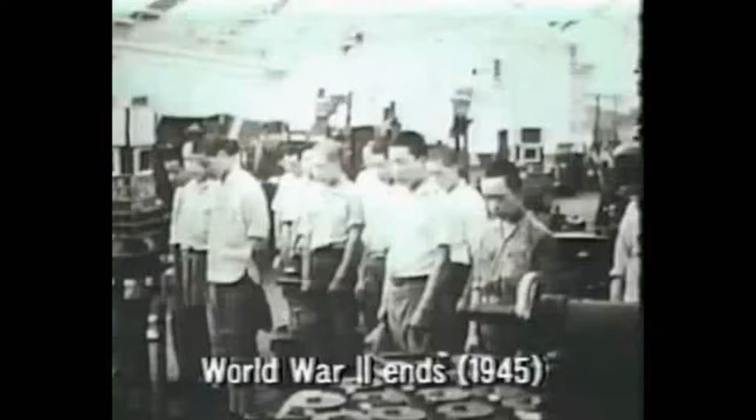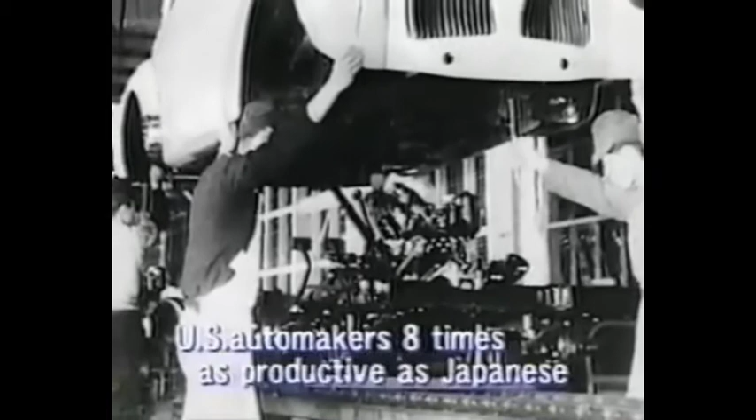After the war, Kiichiro passed on his dream to his cousin Eiji. He instructed Eiji to bring the company up to U.S. standards of technology within 3 years. That was a daunting task. U.S. productivity in automobile manufacturing was 8 times higher than Japan's, and Toyota was short of equipment and capital.

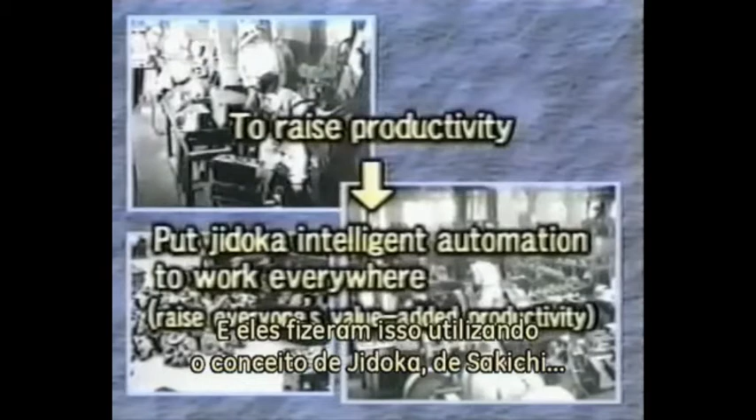So raising productivity was a pressing issue. Eiji assigned a machine shop manager by the name of Taiichi Ohno to develop a more efficient production system. The two men looked for ways to raise the value-added productivity of every worker. They did that by putting Sakichi's Jidoka concept to work throughout their operations.

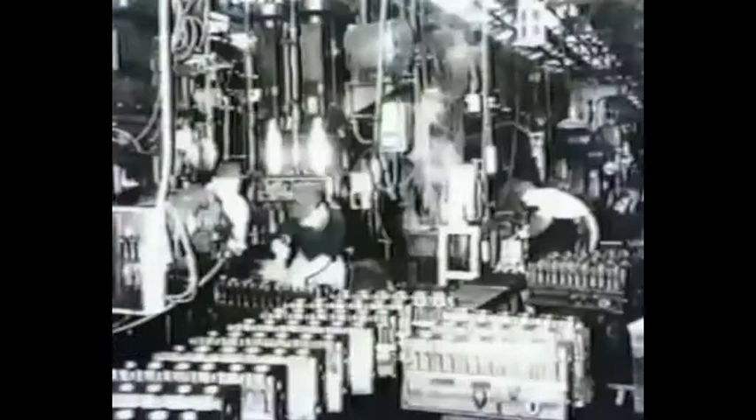They also looked for other ways to stretch their limited resources of equipment and capital. They did that by putting Kiichiro's just-in-time concept to work systematically. Ohno took a cue from the U.S. supermarket. He made each process the customer for the preceding process.

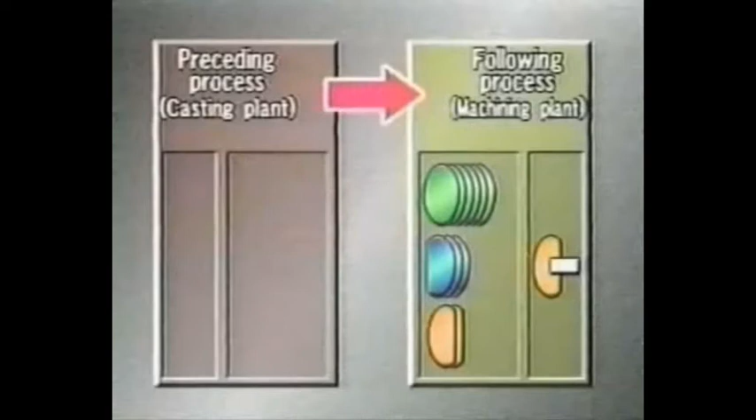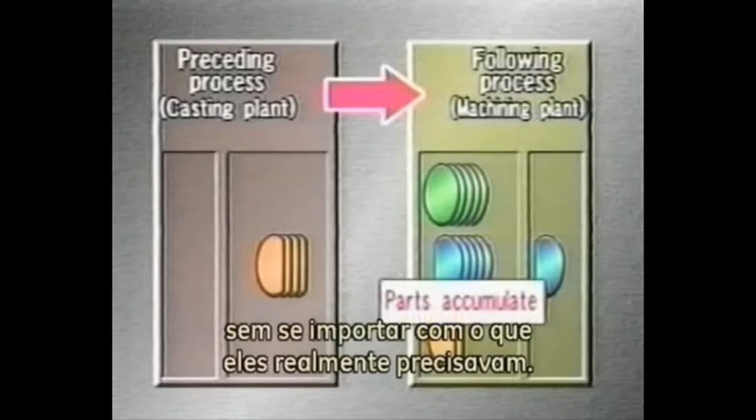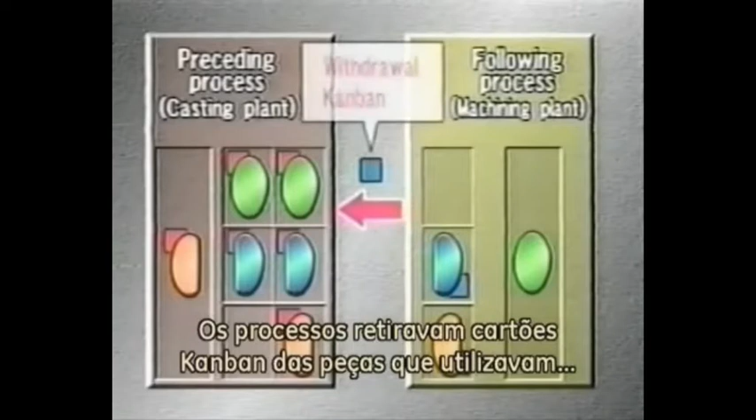In traditional manufacturing, processes delivered parts to the following processes regardless of what was actually needed. Ohno devised a completely new kind of system. Processes used Kanban cards removed from parts they had consumed to withdraw parts from the preceding processes.

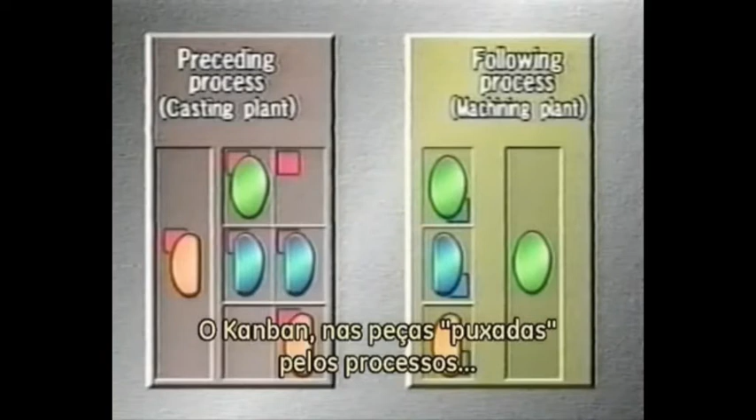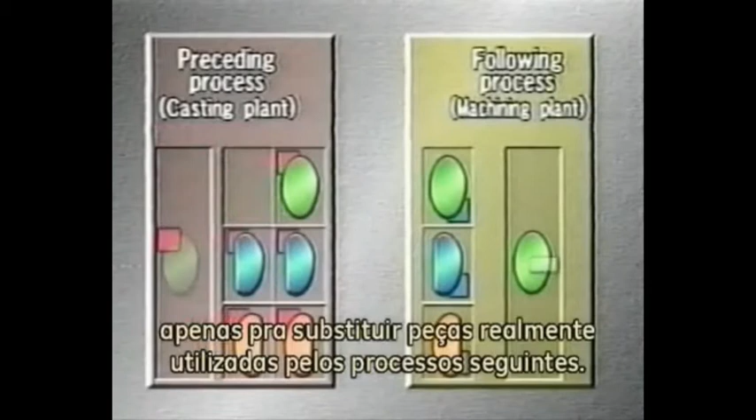Kanban on the parts arrayed by processes came off when the following processes withdrew the parts. They became instructions to make additional parts. The Kanban flow ensured that processes made parts only to replace parts actually consumed by the following processes.

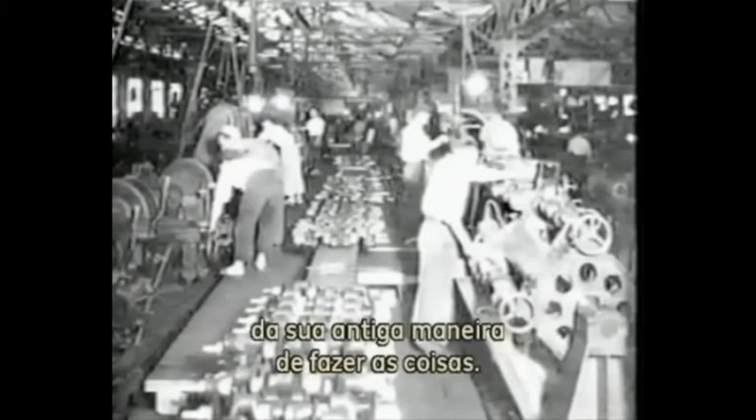Active cooperation by the people in the workplace would be essential to Ohno's system. But at first, people were reluctant to give up their old ways of doing things. Ohno took the initiative. He went into the workplace and taught people how to use his system. Eiji Toyota supported Ohno enthusiastically in putting the new production system in place.

A new production system gradually took shape on the foundation of just-in-time manufacturing and Jidoka intelligent automation. As the Toyota production system, it became a standard for manufacturing industries. The Toyota production system gained global attention after the oil crisis of 1973. Toyota recovered more quickly than other automakers from the crisis, and its production system received much of the credit for that resilience.

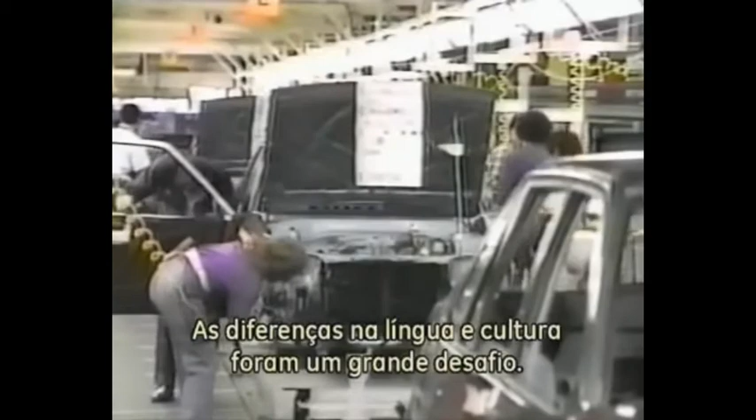General Motors Corporation approached Toyota about setting up a joint venture to make small cars in the United States. The two companies set up New United Motor Manufacturing Incorporated in California in 1984. Differences in language and culture presented big challenges, but the spirit of making things well knows no borders.

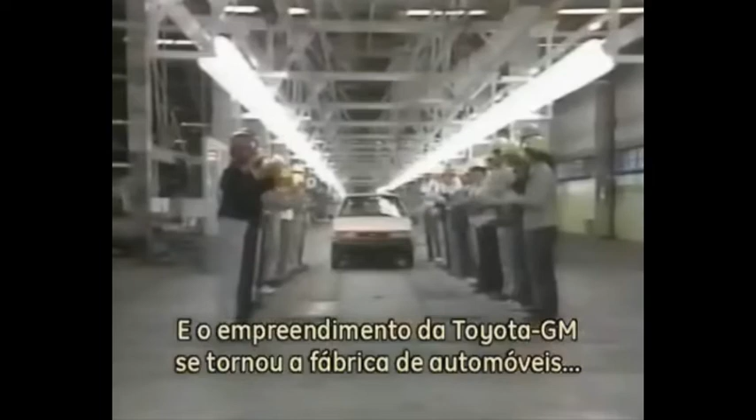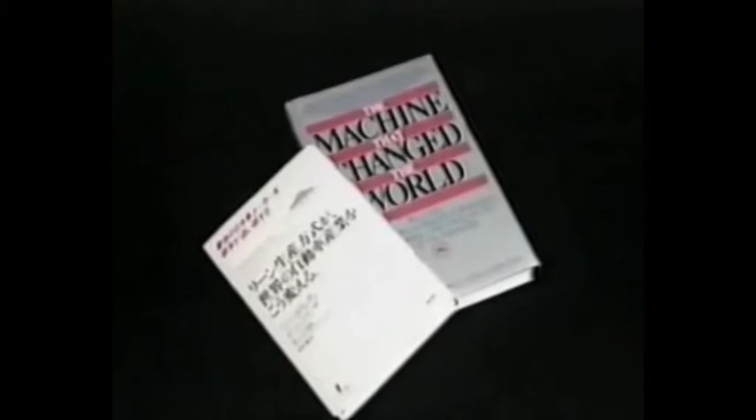People accepted the Toyota production system, and the Toyota GM joint venture became the highest-ranked automobile plant in the United States for quality. It became a symbol of successful industrial cooperation between Japan and the United States. A book published by the Massachusetts Institute of Technology hailed the Toyota production system as the machine that changed the world.

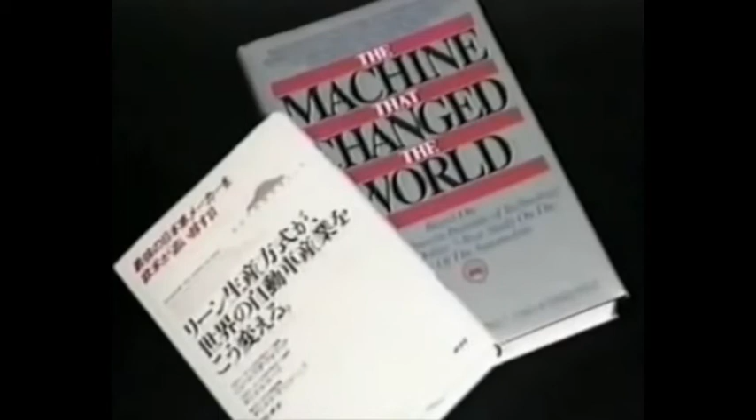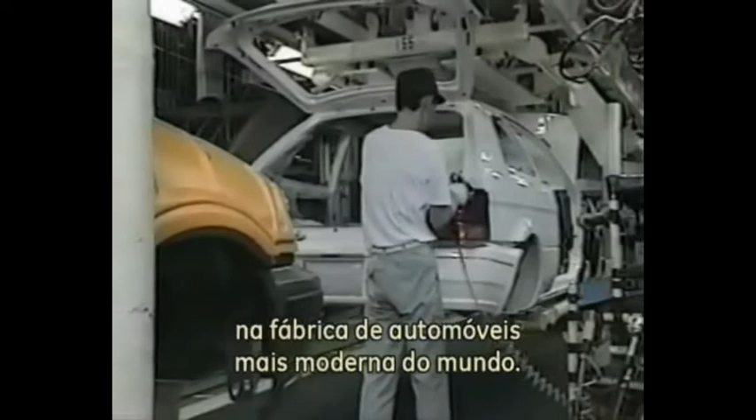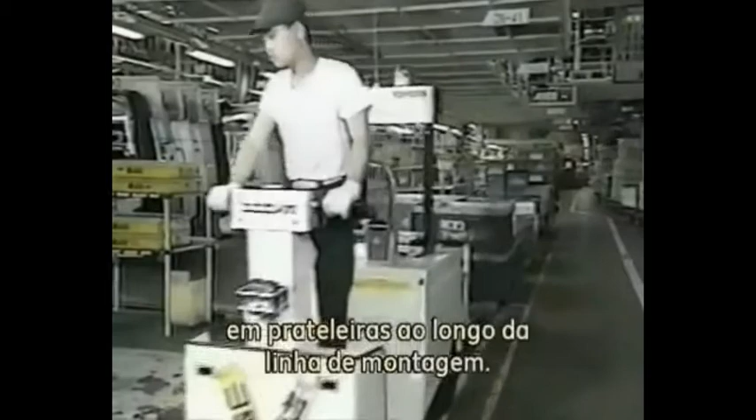Today, the Toyota production system has gained a worldwide following. Let's see how the system now operates in the world's most modern automobile plants. The trucks that deliver parts to the plants carry a variety of items in each load. That allows each truck to travel fully loaded, which minimizes trips and thus reduces traffic congestion. Forklifts carry the parts unloaded from the delivery trucks to racks alongside the assembly lines.

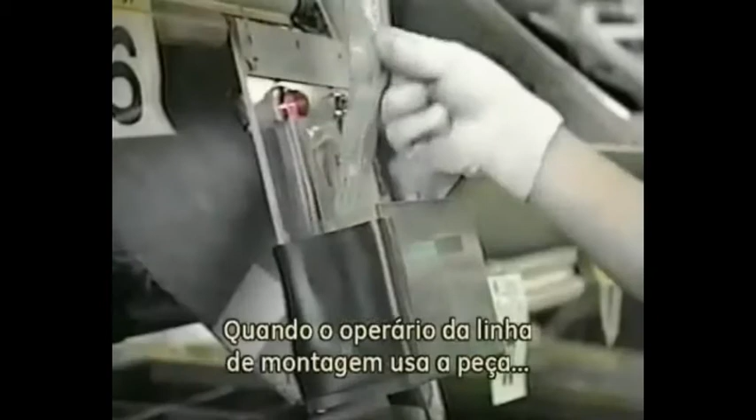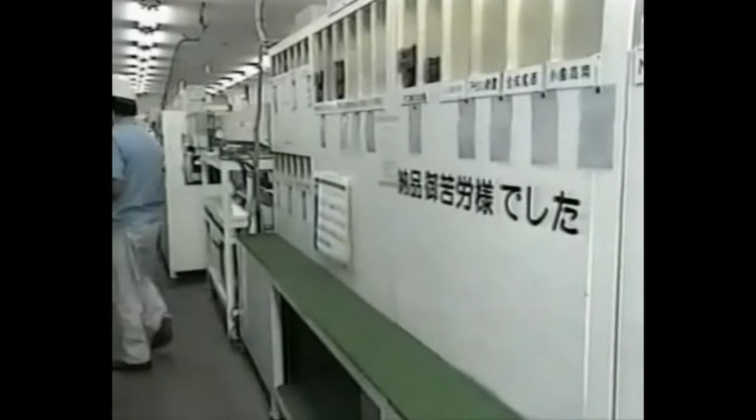When people on the assembly line use the parts, they remove the attached Kanban cards. The Kanban get picked up regularly and sorted. The delivery truck drivers pick up the Kanban for their company or companies before leaving. Back at the supplier's plants, the Kanban become orders for withdrawing additional parts. Sorting arranges the Kanban according to area in the plant.

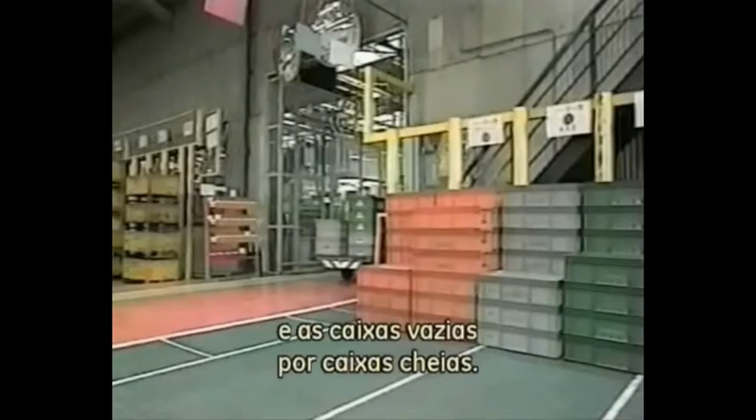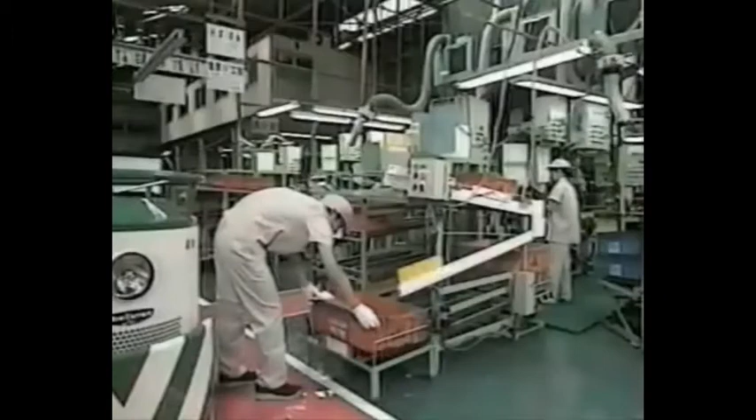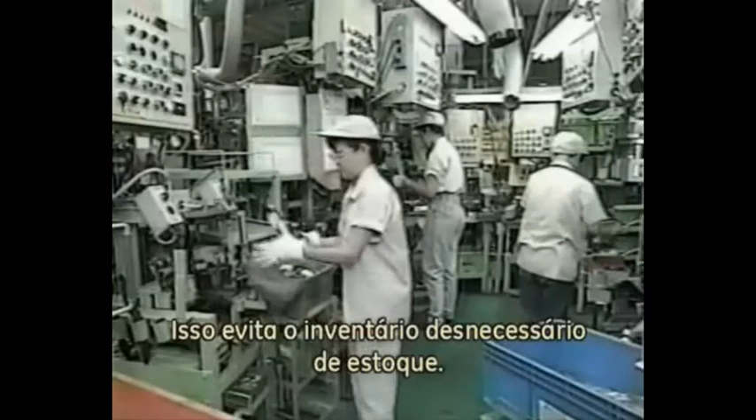Shipping personnel exchange the Kanban and empty boxes for full boxes. The production processes in the plant make additional parts only to replace parts that have been withdrawn. That prevents the wasteful buildup of inventories. When the shipping personnel have gathered a full truckload of parts, a truck carries the parts to the vehicle plant.

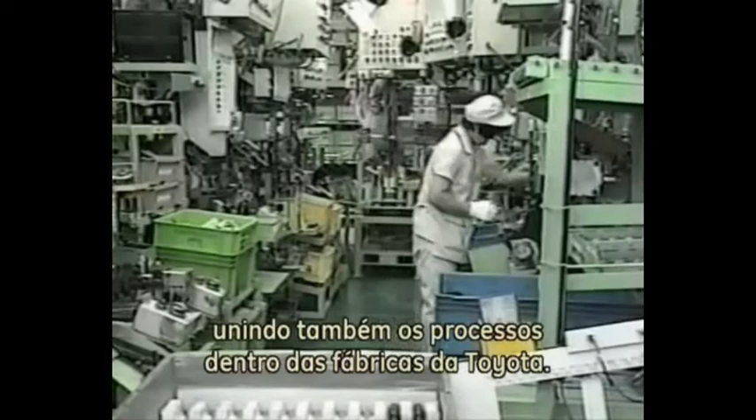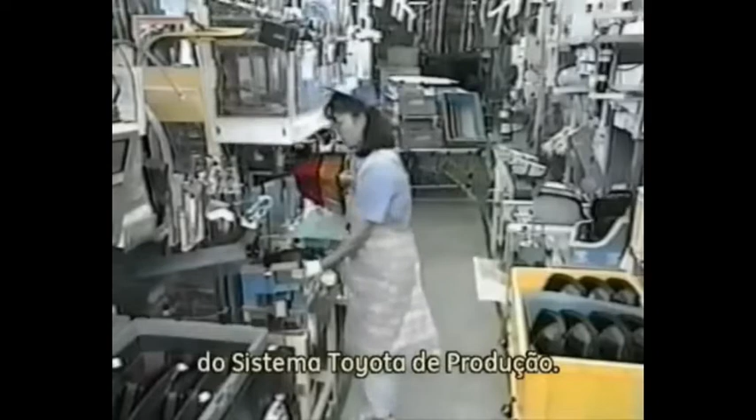Kanban thus link Toyota plants with suppliers' plants, as well as linking the processes inside the Toyota plants. Just-in-time manufacturing minimizes inventories, eliminates waste, and maximizes productivity at all the plants that participate in the Toyota production system. Jidoka intelligent automation also continues to play a big role in the system.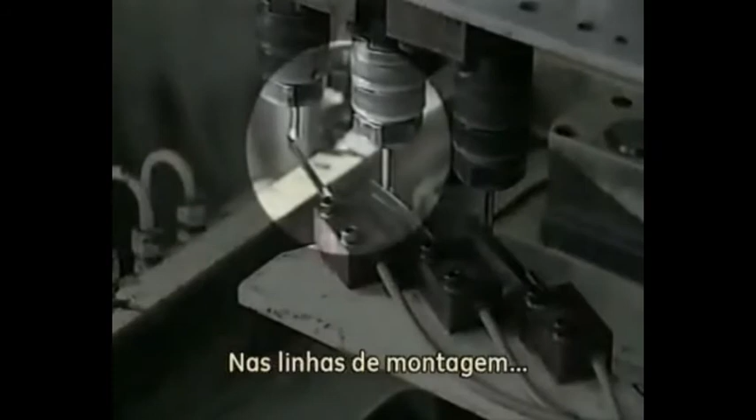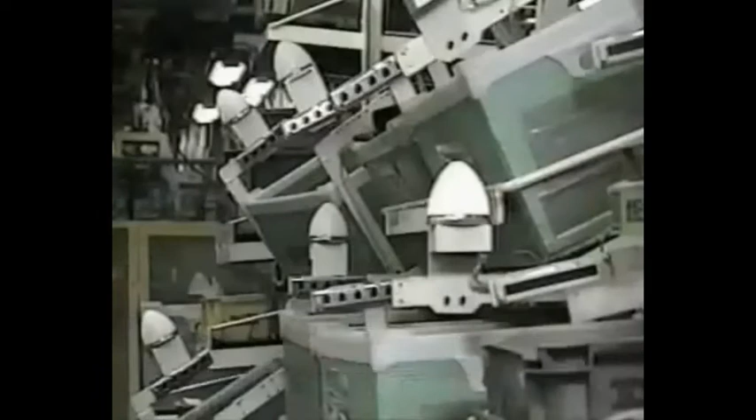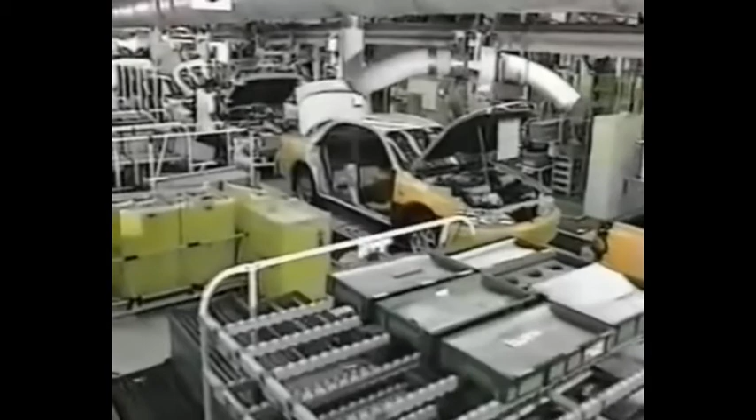On automated machining lines, numbered lamps light up to call attention immediately to any problems detected by sensors. On assembly lines, the employees themselves have devised countless Jidoka measures to prevent defective work. So Sakichi's concept continues to prevent waste. The idea is to build quality assurance into every process, and it works.

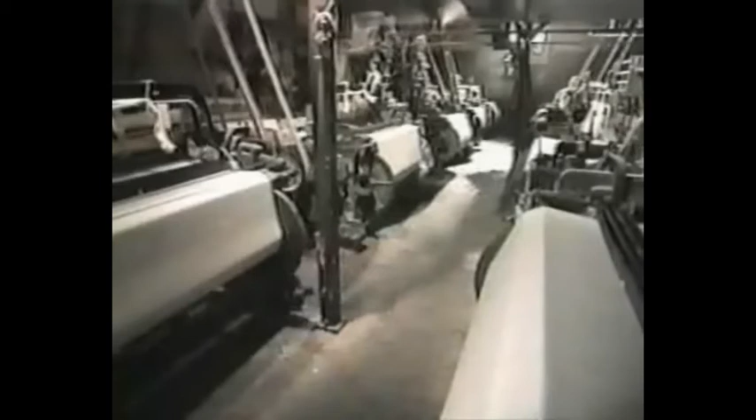The foundation for the Toyota production system has been established by Sakichi's Jidoka intelligent automation and his son Kiichiro's just-in-time manufacturing. Taiichi Ohno and others put those concepts to work systematically with the strong support of Eiji Toyota and his passion for manufacturing.

The Toyota production system continues to evolve in response to changing needs and circumstances, but the fundamental concepts are eternal, including Toyota's commitment to continuing improvement in every phase of products and operations. Those concepts underlie a lasting contribution to enhancing the quality of life for people everywhere.